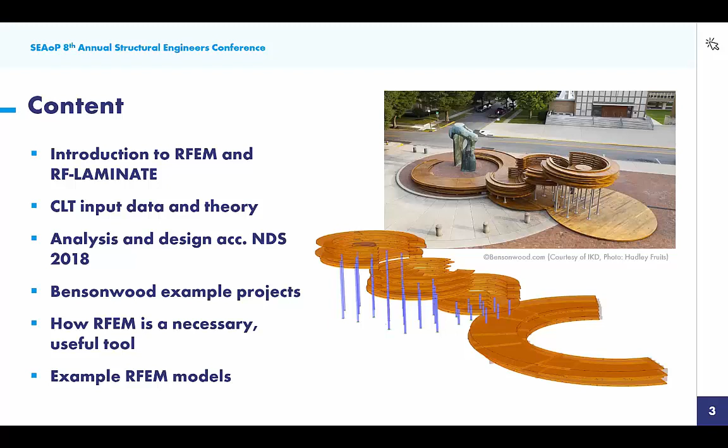Then I'll turn it over to Florian, who is an engineer at Bensonwood, to show you some real-world applications of cross-laminated timber, mass timber, with some example projects that they have worked on. He'll talk about how they found RFEM to be a necessary and useful tool in these projects and go through a few example RFEM models as well.

So I am going to begin within our program RFEM. This is the main structural analysis program. It will provide a full analysis, so things like internal forces, deflection, support reactions. We work with this add-on module concept to provide design of our elements, and today we'll be looking at RF-LAMINATE, which provides design of cross-laminated timber.

For the sake of time, I have already modeled a two-story structure here, and you'll notice that we have several surfaces. If I double click on one of these surfaces, the stiffness type is set to laminate, and this refers to our RF-LAMINATE add-on module, which we'll get into in just a minute, on how we can accurately calculate the stiffness properties of CLT panels.

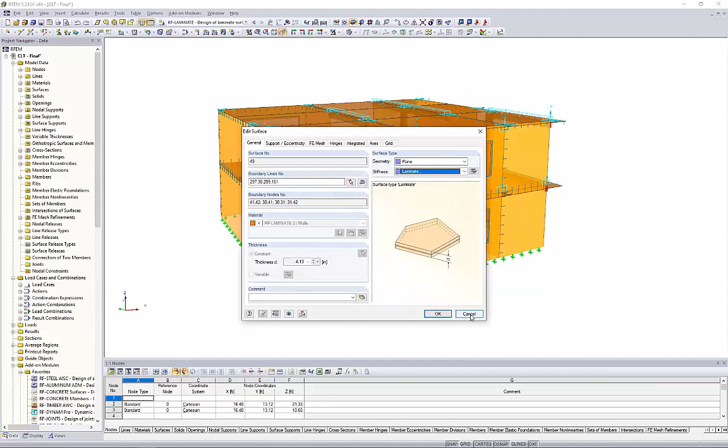I've also combined this with member elements. You'll see here glulam beams, which are dropped down below the bottom of the surfaces for additional support. We have some glulam columns as well, all within the same project. I've also applied loads to this structure. These are just general surface loads.

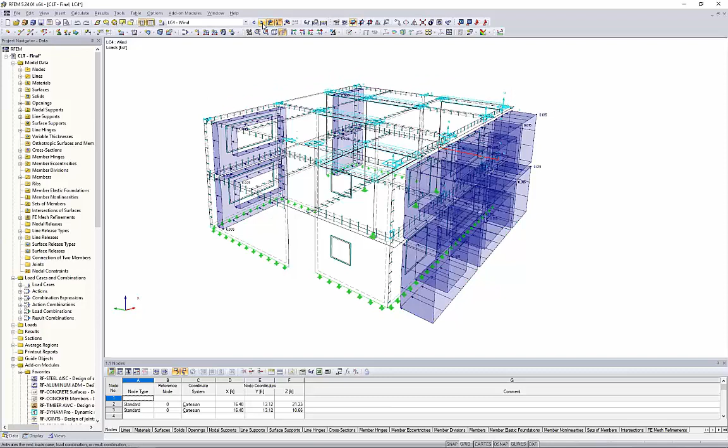Maybe if I turn this to wireframe, it's a little bit easier. We have a dead load applied to the first level and the roof level, a live load, a simple snow load applied at the roof level, and then a lateral wind load. I combined all these load cases into load combinations according to ASCE 7. So when we display these together, you'll see the gravity loads in addition to lateral loads acting on the structure altogether.

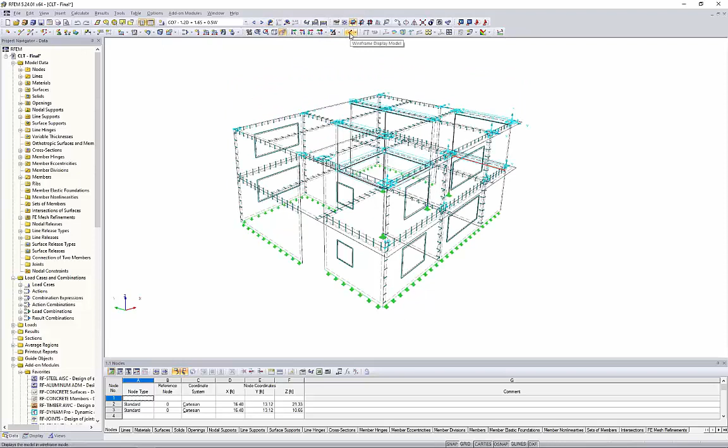But before we run this initial calculation, what's required is to define the correct stiffness types for our cross-laminated timber, and for this we utilize the add-on module RF-LAMINATE. I can access RF-LAMINATE within my project navigator on the left. And when I say add-on module, it's really nothing more than a dialog box that pops up within our main program. So before I give you a quick tour, let us jump back to the PowerPoint to see what's happening behind the scenes with this add-on module and how it's working with RFEM, the main program.

We know with cross-laminated timber that this is going to be individual layers oriented 90 degrees. Each individual layer has its own stiffness properties, so modulus of elasticity, shear modulus. In turn, these individual layers have their own stiffness matrix as well. So these individual layers are what we're going to be defining within RF-LAMINATE.

What we do with these individual layers is create the overall panel. And what's required for this panel, which we might use for a wall element or floor element, is to generate the overall stiffness matrix. We call this the global stiffness matrix of this panel.

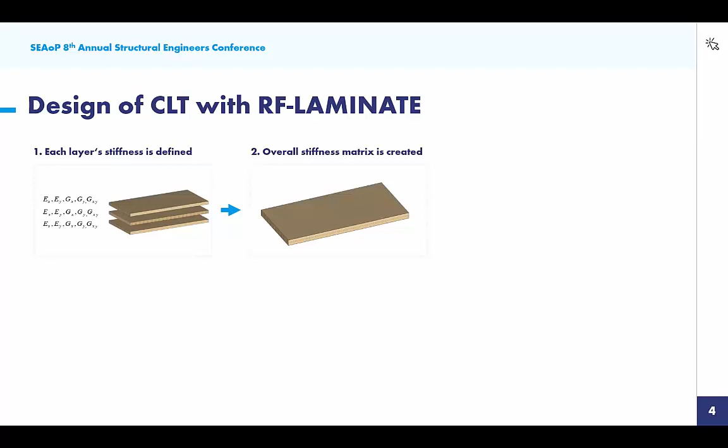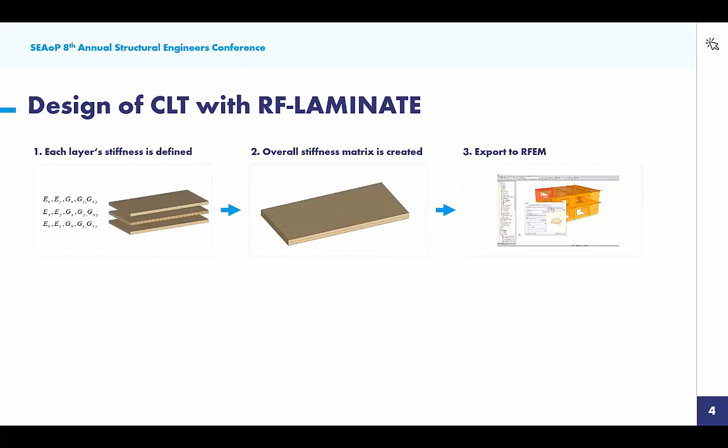So this includes the dead load, live load, wind, snow load. After we run this analysis, we're going to get internal forces for each one of these CLT panels. We take these internal forces from RFEM and bring them back into the add-on module, and we distribute these stresses to each individual layer. Here might be another sample calculation for separating out those stresses.

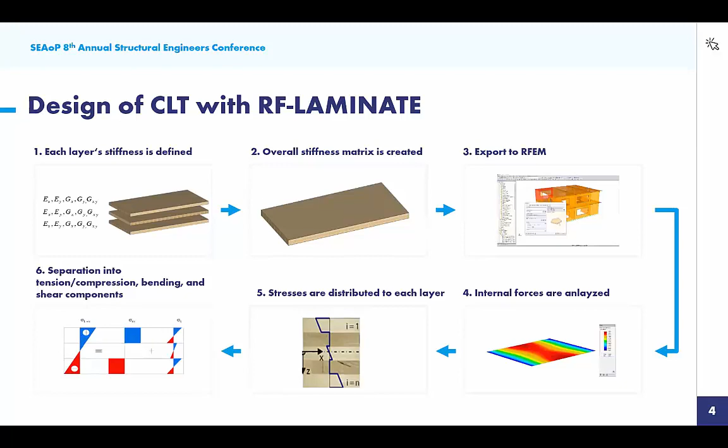Now, if we take a cross-section of our CLT panel, we might see the stress distribution look something similar to this. From here, we separate out all of these stresses into tension, compression, bending, and shear components. These stresses from the analysis are ultimately what we're comparing with our design stresses or limiting stresses based on the material as well as the NDS code. From this, we finally get a design ratio for our CLT panel. So that's what's going on in the background.

So jumping back to RFEM, just to give a quick tour of what this add-on module requires as input, you can see that I can choose the surfaces that I'd like for design. Currently, I've only selected the roof panels as well as 3 wall panels. We could design all at once if we wanted to.

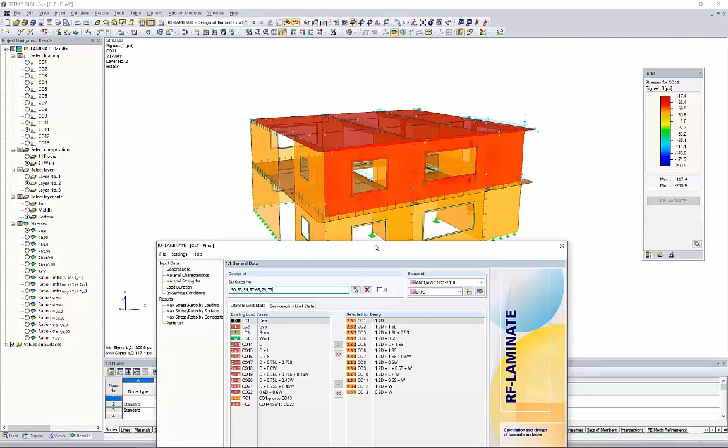Over on the right-hand side, we're going to choose our design standard. You can see the NDS. Recently the NDS has added CLT design with the 2015 standard. We also have the 2018 standard. We have the Canadian standards because that was recently implemented there, and then, of course, the Eurocode.

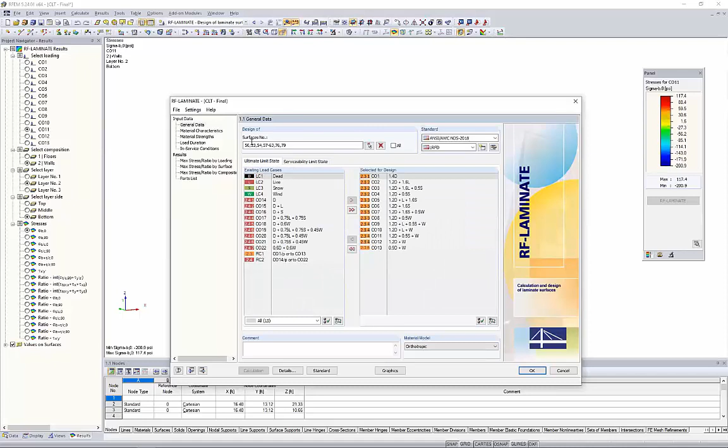For the ultimate limit state design, we would move our LRFD load combinations over here to the right, simply because I'm choosing the design method according to LRFD. Notice ASD is also available here. We can also check serviceability for these panels, so deflection checks, and I'll show you later where we can set that limiting deflection ratio. For this simple example I'm not doing deflection checks, but we'd move the unfactored ASD load combinations to the right-hand side. So it's really as easy as moving down these tables from top to bottom.

Next table, material characteristics, relates back to the PowerPoint model where we're defining the individual layers of our CLT panel. For the first layer, we can access our material database and use the filters on the left to filter to timber. We might choose North America, the NDS 2018, and here's about every timber material available within the standard, with all the relevant material properties. You can use these search functions as well.

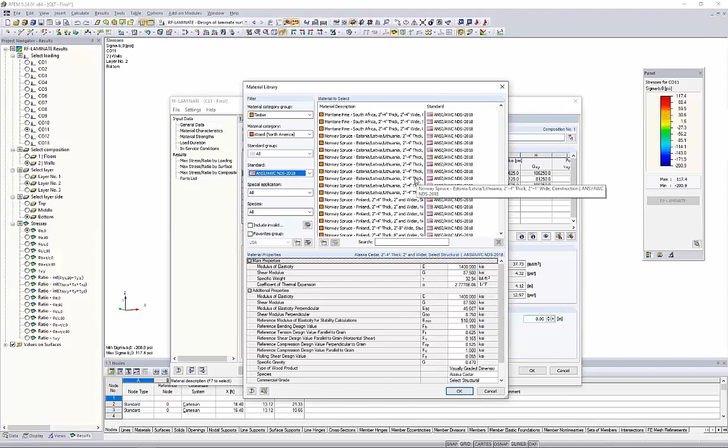Once you've determined the material for that first layer, we would select it. You'd input the thickness, and notice in the third column is the orthotropic direction: 0 degrees, 90 degrees, 0 degrees, and so on. That's the definition of CLT, orienting layers 90 degrees from each other. Then the modulus of elasticity and shear modulus are automatically brought in from the material database. We'd continue to do so for our additional layers.

This might be for a custom layup, a custom CLT composition. We could save these layers to use in a future mass timber project within RFEM. The other option is to import the layers from the library. You can see a drop-down box of various manufacturers. For CLT in the North American market, some familiar names: Nordic Structures, SmartLam, Structurlam, and then the general PRG 320. For example purposes, we might move forward with PRG 320 CLT according to the US.

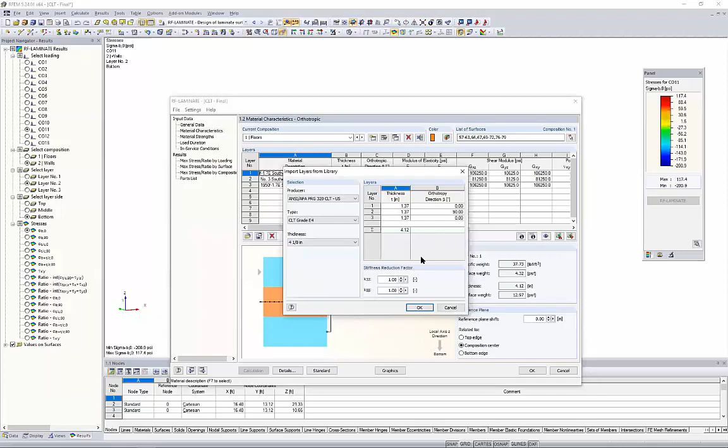So once we select our manufacturer, we would choose our grade from the drop-down. We would choose our thickness, which is going to influence the number of layers for our CLT panel. But notice that the layers are automatically brought in, the thicknesses, the directions. And when we import that in, this entire table will be filled out for us based on the manufacturer's products. So just another option if you do see your manufacturer in there. Otherwise, you can create those custom layups and save them to your library.

Now, again, relating back to the PowerPoint, each one of these individual layers has its own stiffness matrix. So we can actually view the individual stiffness matrix here for that single layer. Well, the program takes it a step further, of course, and it calculates this global stiffness matrix for our panel. So if you're not utilizing a program where you can individually define these layers, you're going to need to put in the global stiffness matrix into your relevant FEA program. So this might be something that perhaps you get from the manufacturer, but ultimately this is the information we need to export back out to RFEM.

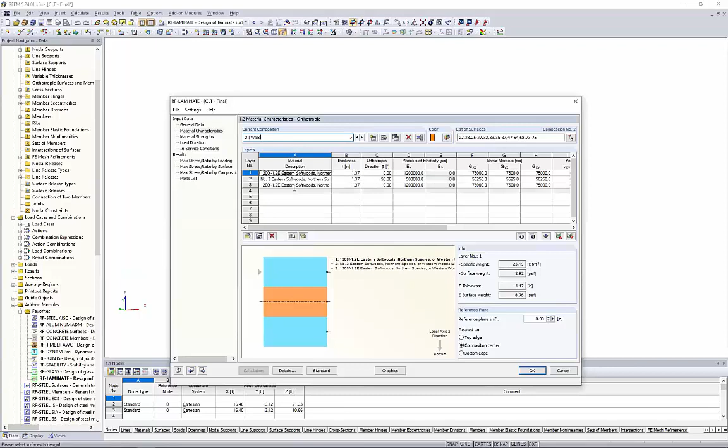So you can see here that I named this composition floors, and I've applied it here to all of my surfaces that are my floor elements. And we can create different compositions for the roof versus the first floor. That's all possible. Exact same concept for my second composition here, my wall elements. And this time I also just have 3 layers for my wall elements. Perhaps we have 5. You can see that I've applied these to all of my wall elements back in the RFEM model.

So before we move forward here, there are some details within these compositions that are really important for analysis, and we can visit those under the detail settings here. So you'll notice we have several options that we can check on and off, as well as stiffness reduction factors. So in order to discuss this a little bit further, I'm going to jump back to this PowerPoint. So here's just a simple screenshot of those first checkbox options.

You can see here the consider coupling is the first one, and this typically is going to be turned on by default. What this means is that we have glue at the top and bottom of each layer, so we have kind of a coupling behavior between each one of the layers. Now, with this option checked on, this would be relevant to our snapshot over here on the left with coupling. So this is a cross section of our CLT, 5 layers in this example. We might see this stress distribution for something like shear stress looking similar to what's shown on the right, normal stress on the left, but notice that there's a relationship here between all 5 of the layers.

When we turn this option off, or assuming we don't have glue or bonding between the top and bottom of these layers, the stress distribution is really going to be individual for each one of these layers. Notice we don't have that same relationship between all 5 layers now. It's really independent. So typically, again, you probably will have this checked in most situations.

The second option, the cross-laminated timber without glue at the narrow sides, this is really specific to the manufacturer that you're using. And this all relates to edge bonding. And we can see this picture over here on the right, a very exaggerated picture of a cross-section of CLT. We know that for each individual layer, the boards are essentially adjacent to each other within one of these layers, kind of similar to what's shown here. Now, again, very exaggerated picture, but what we mean without glue at the narrow sides, we do not have glue in these gaps here. So the boards are not bonded to each other in a single layer.

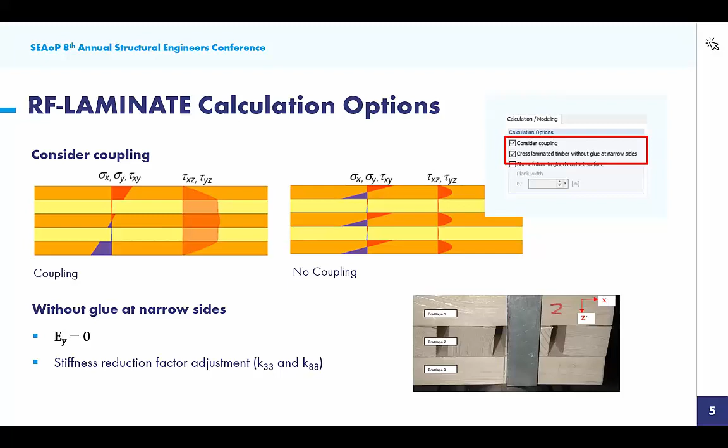So when we have this option checked on, we're automatically going to assume your modulus of elasticity in the y direction of the surface is equal to 0. So we really don't have much stiffness in that orientation of the panel. Now, it's highly recommended that you also reduce the stiffness. We would apply a stiffness reduction factor, K33 and K88, which in turn relate to the stiffness matrix entries D33 and D88. So K33 is related to torsional stiffness and K88 is related to in-plane membrane stiffness. Now, I want to discuss this a little bit further on the next slide.

So the NDS, as well as the Canadian standard, CSA standard, really do not address glue not being applied at the narrow edges or edge bonding at all. It really goes on to say nothing about this. So what we would refer to here is actually the Eurocode, the EC5, and in particular the Austrian Annex, which lays out very clearly what to do when we do not have edge bonding and how to calculate K33 and K88, those reduction factors.

So it does require a few variables for the equations, and we can see the initial variables are given to us here: the total thickness of the CLT panel, the number of layers. So in our case today, we have 3 layers. The board width, today's example, 4 inches. This is information we get from the manufacturer. The board height, 1.37 inches.

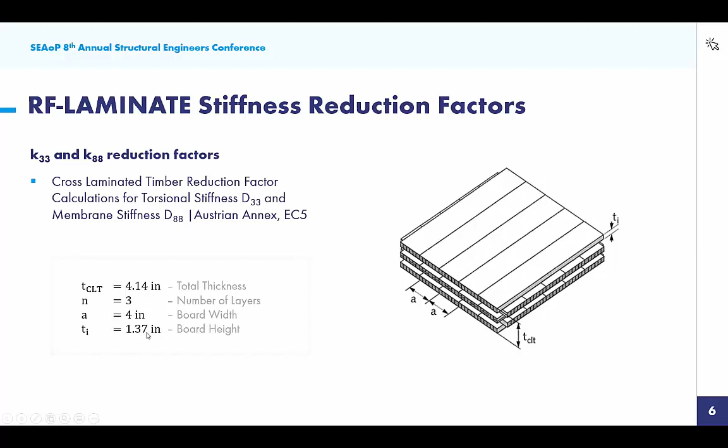So taking a look at the next slide, we also have some additional variables that are given directly in the EC5 Austrian Annex. Depending on the number of layers, 3, 5, or 7, you'll see these variables here, PD, QD, and so on. Well, these are also needed for the K33, K88 equations. And those equations are listed here. Again, directly from the standard, it's laid out quite clearly how we need to reduce the stiffness when we don't have that edge bonding. So we take all these variables from the previous slide and from our table here, and we're ultimately calculating K33 as 0.435 in our example today.

Well, this is the information we apply directly in the program under those composition details. Same concept for K88. We're going to apply those directly here. Now, for some of the manufacturers, these values are included if they don't have edge bonding. For others, maybe we weren't able to get this information. So always just something to double check for your particular project, your manufacturer, and which CLT panels you're using. And again, not specific to RFEM, but this would be a stiffness reduction you'd want to apply with your own analysis tools.

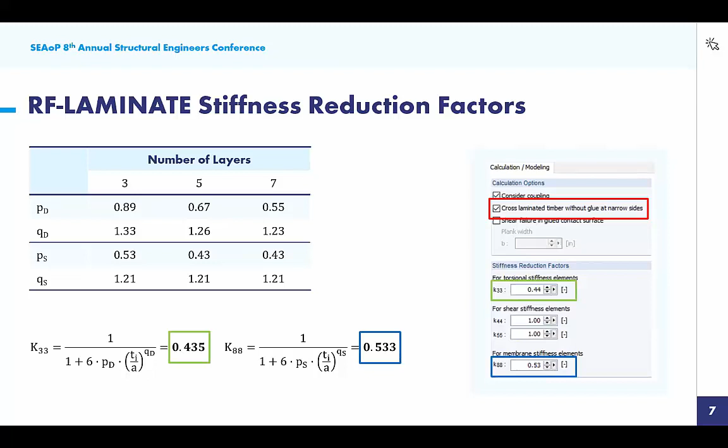The final consideration here for these check boxes up at the top is shear failure in glued contact surface. And this actually all relates to torsion. And we're really mostly concerned with torsion when we're talking about CLT wall elements loaded in plane. We're probably not so concerned with torsion when we're talking about floor elements, for example. Now, this really is also only a concern when we don't have glue at the narrow sides again. So this first checkbox must be checked. That will make this third checkbox available here so that we can take a look at torsion considerations.

Just a small tip, it's really important to set the FE mesh back in RFEM. So our FE mesh settings for the length approximately equal to the board width. So in our case, that would be 4 inches, just for the most accurate analysis. Now, once again, the NDS standard and the CSA standard don't address torsion whatsoever. So we refer back to the Eurocode 5, the 2010 version. I think we're all kind of in agreement that the European standards have been doing cross-laminated timber much longer than what we've seen here in North America. So it's pretty safe to say we can refer back to these standards for considerations such as torsion.

And once again, complete interaction equations are given quite clearly directly within the standard, and we can see those interaction equations in the lower left corner here. And this includes 3 different terms. The first term can be shown over here on the right-hand side, the second term lower right-hand side, and then the third term would be those internal forces and stresses directly from the RFEM analysis to ultimately give us our design ratio for torsion for our wall elements.

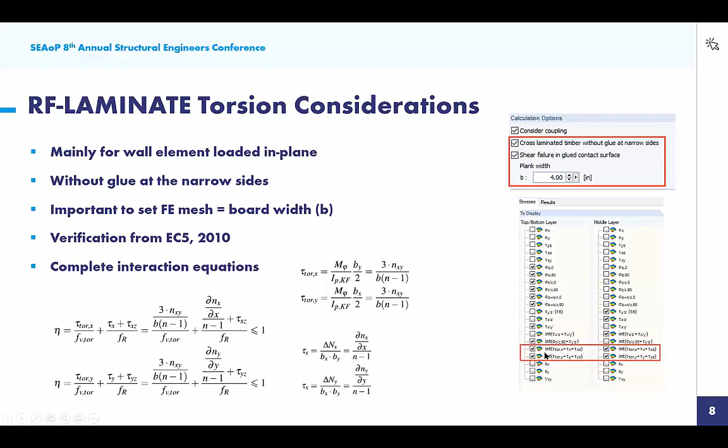Now, over on the right-hand side, you'll see that we have all of these different stresses available to us within RF-LAMINATE. And it's pretty overwhelming. So what we've tried to do is to only check the check boxes that are relevant for CLT design. Now, this includes the top and bottom layers as well as the middle layers, and torsion is actually not one of them that we have checked on by default. So I'll show you in just a minute how we can turn those on in order to take that into consideration for our results that are being shown.

So we'll go back to RF-LAMINATE. If you remember way back when, we still have this dialog box open, and we're currently looking at my wall elements, and we are considering coupling. We don't have glue at the narrow sides. We are concerned with torsion, so we want to go ahead and put in here our plank width or our board width equal to 4 inches.

And just like I showed in the PowerPoint, I calculated K33 and K88, which I'm inputting in here as well. So for my floor elements, if we jump back to those, same exact concept, but I'm not concerned with torsion here. So we can leave that option checked off, but we're still applying that stiffness reduction factor K33, K88.

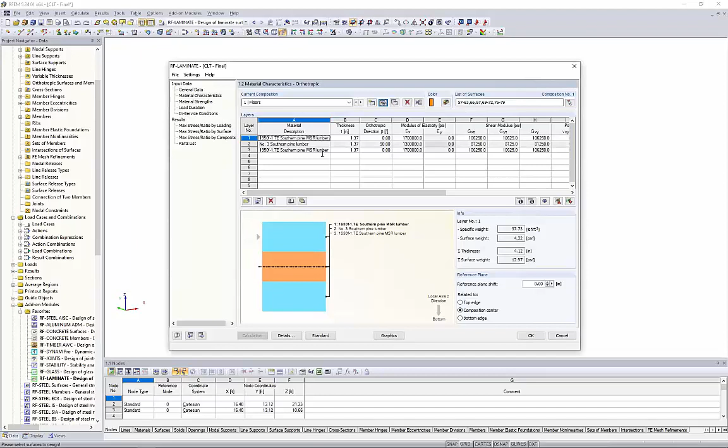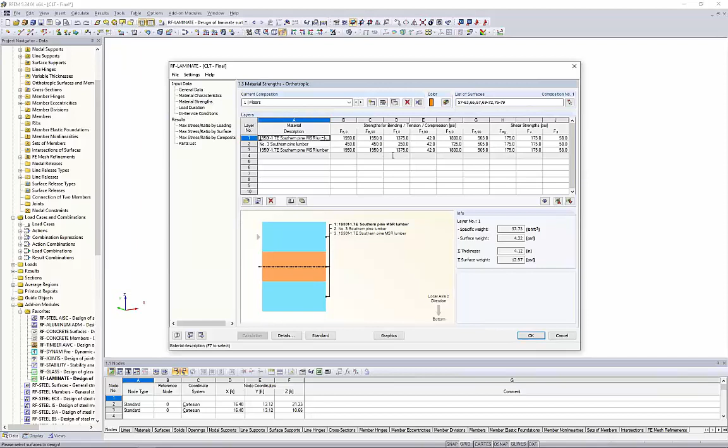So once we have input all this information here for those material characteristics, we can just jump down to our next table, material strengths. Really not much to do here. Everything is brought in from that material library. It's just showing us the strengths for bending, tension, compression, and shear. So this information based on the material properties, in addition to the NDS factors, is what's going to give us our limiting stress values.

And so when we're talking the NDS factors, we might be looking at the load duration factor, which we can see is set within this next table. So dead, live, snow, wind, we would set the load duration factor here. In-service conditions: is your CLT panel dry? Is it wet? What is the temperature it's sustaining? And all of these factors are actually found under the standard tab. So we can see here the relevant factors that are going to be applied for the design purposes.

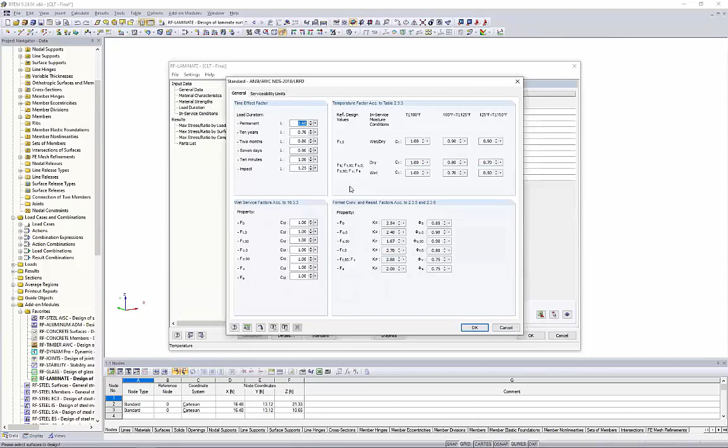You'll also notice the second tab here, serviceability limits. That's what I was talking about. We also can check deflections where we set this limiting deflection ratio directly within the program. We're not checking serviceability today, so this isn't applied, but just to let you know it is available.

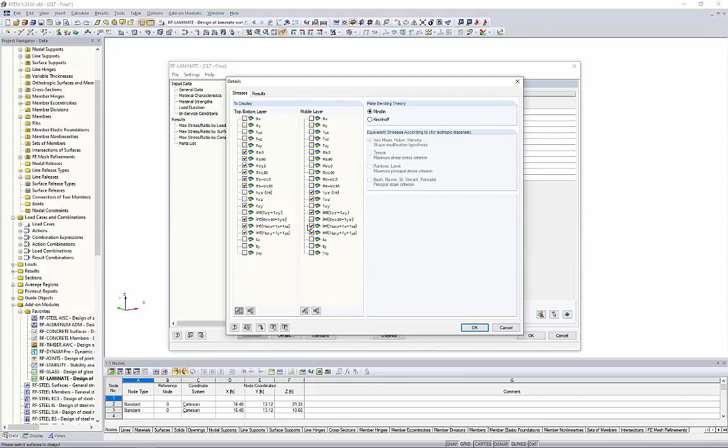So before we're ready to run our calculation, remember I wanted to turn on the torsion checks, so we can do that under the detail settings. And once again, here's this long list of all these different stresses that we can compare and give design ratios. Way too overwhelming. So we have just the default settings here, which likely is going to be most relevant for your CLT design. But here in the lower portion is where we can activate the torsion checks as well.

So we're almost ready to run that calculation, but before we do so, let me jump back to the RFEM program. And again, this is just our main structure, and you'll notice that we have all of these blue symbols shown everywhere. So we might be wondering, well, what are these used for and why are they relevant? And again, incredibly important for the true properties here of our CLT structure.

So let's begin with a couple of adjacent panels, and I'll highlight these and we'll take a look at just the visibility by these selected objects. So two CLT panels side by side, and I'd say in most FEA programs when we're modeling two surfaces side by side like this, the program is going to assume that we have a fully rigid connection between these two panels. And we all know with CLT design that that's not the case. Rather, we're going to be utilizing some type of screw connection maybe, where we have this partially fixed connection, but definitely not a fully rigid connection.

So that's why we would utilize in the program what's called a line hinge. So when I double click on this line hinge, you'll notice I have the ability to fully release the moment between the two panels. So that's probably one consideration we want to take. We also have the ability here along the joint length to set some type of spring constant, and this might be for the slip of those screws between the two panels. For my example today, I set this to 50 kips per square foot, but this would all be relevant to the type of CLT connection that you're using for your projects.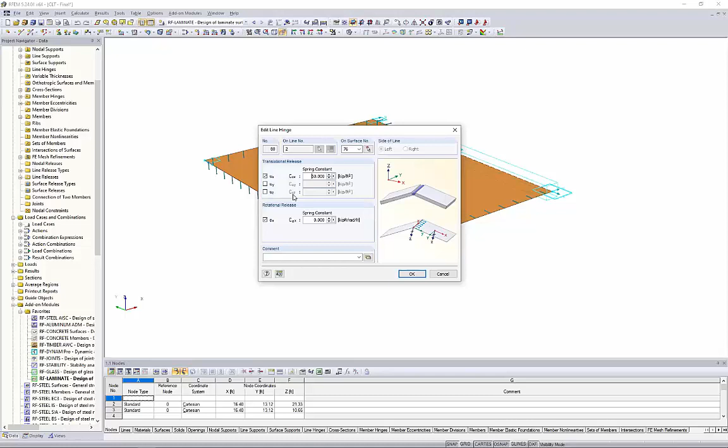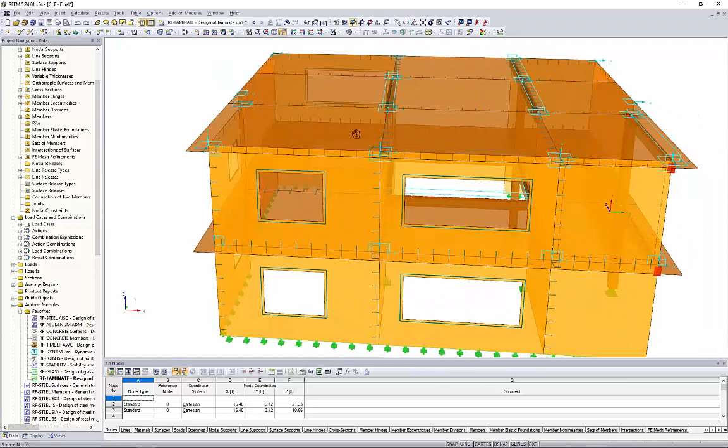The other 2 degrees of freedom here, translation in the Y and Z direction, are left at fully fixed. So this is definitely something that you need to apply, and this is why you're seeing, when I cancel out of this visibility mode, these line hinge symbols shown everywhere throughout the panel connections. The other symbol that we're looking at here are these long blue lines. And for this, let me go ahead and create a user-defined visibility here, just so that this is a little bit more clear.

Well, similar to our adjacent panels, we have these beams dropped down below the CLT panels just for additional support here, these downspan glulam beams. Very similar to what we're seeing with the CLT panel connection when they're adjacent to each other, this is going to assume a fully rigid connection between this beam and the CLT panel. Once again, we know that's not the case because of these screw type connections.

So we need to adjust this fully rigid connection here, and we do so with what's called a line release. When I double click on this line release, it's actually very similar to a line hinge. It's just a little bit more applicable to beam to panel connections. With this, we can define the line release type by releasing the moment. Once again, we can see that here. And then we're also going to apply that stiffness slip to the joint along the local x-axis of the line here, so 50 kips per square foot. The other two we leave as fully fixed.

Now, another advantage of a line release over a line hinge is the ability to define nonlinearity. So you're going to see here friction, partial activity, and so on. Where this might be relevant is in the vertical direction. Maybe we have a scenario where we would like full force transfer when we have the CLT panel bearing down on the member, but in the event of uplift, we want that to be completely released. That's all possible with these nonlinear applications. So that's why we have these line releases everywhere where we have a beam connecting to the panel above it.

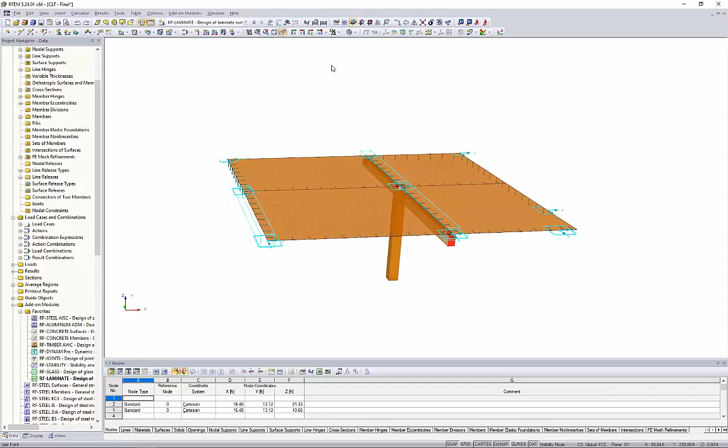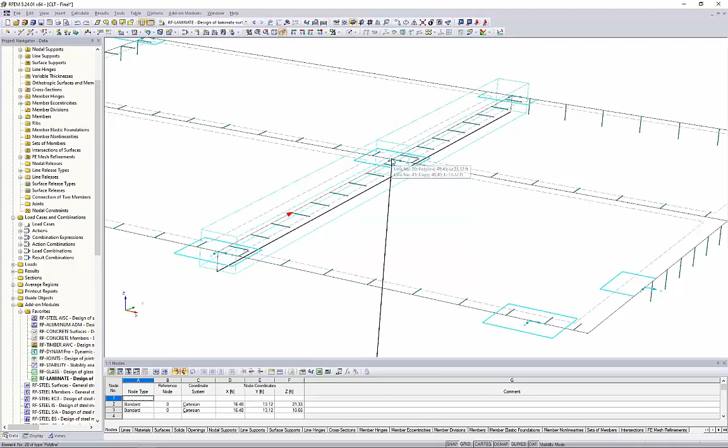Now, the final application here, which we'll notice, is these rectangular blue squares. These are going to be used for singularities. And where might we see a singularity? Well, we convert this to a wireframe view, and we know from general FEA programs, and this is true not just for RFEM but for all programs, that members are represented by single line elements at their centroid. So this column is just a single line element, and it's framing into these 2D surfaces at this single tiny FE mesh point here. So you can imagine the huge spike in stress or internal forces that we're going to see at this single FE mesh point, simply because we don't have great load distribution. Singularities happen in all FEA programs, so you're going to have to find some way to level them out.

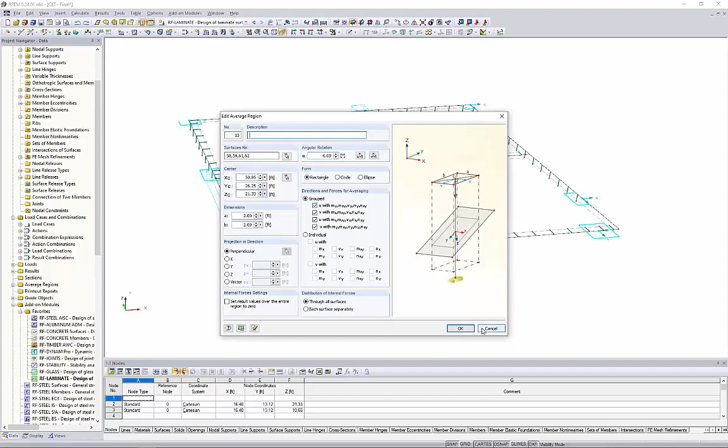In RFEM, we can apply what's called an average region at these locations. An average region is exactly what it sounds like. It's going to average out the forces over a specified dimension. So I've set here 2 feet by 2 feet. I'm averaging out the forces in all 4 directions, and we can smooth out those high peak internal forces and stresses that we know aren't going to exist in a real life application, but are not really avoidable when we're talking FEA design. So that's why we have these average regions shown within the structure. Canceling out this visibility mode, that explains why we're seeing all of these blue symbols everywhere. Now, these average regions can be taken into consideration within the add-on module RF-LAMINATE as well.

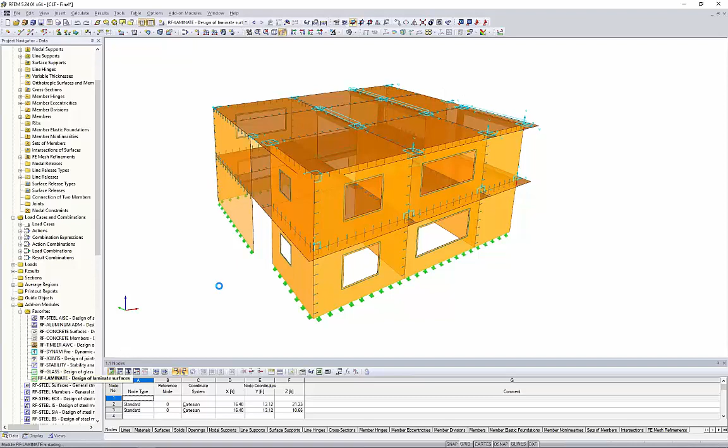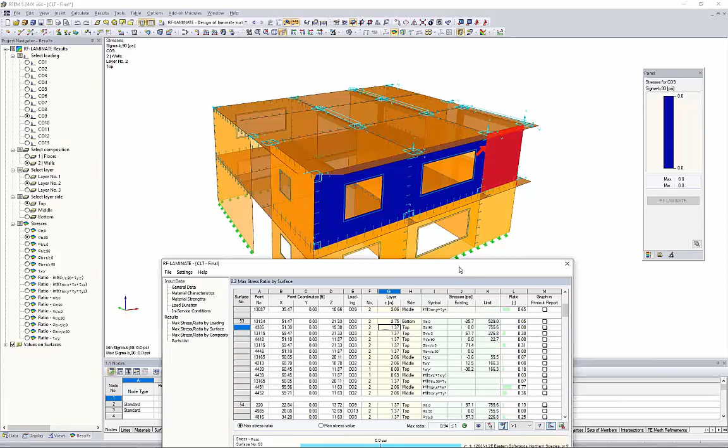So once we've applied all these line hinges, line releases, and average regions, if they're necessary, we're finally ready to run the calculation. So we'd hit calculation within our add-on module, and we're presented with our results in table format. We can view the max stress ratio by surface, for example. As I'm scrolling down through this table, everything's synced up in the background to highlight the surface that I'm looking at. Maybe a little bit difficult for you to see, but there is a red arrow here pointing exactly to where my controlling stress point is for that particular check. So that's a nice feature to see, relative to the table, where exactly we're at in the structure.

But taking a look at the actual data that's presented in this table, well, this is where we're going to see each individual surface in each one of these categories here. And we're going to see the bending stresses. We're going to see tension compression stresses. We're going to see combined bending, tension, compression, as well as shear. This does include rolling shear checks as well. And then remember those torsion checks that we've also activated.

So within column J here, we're seeing the existing stresses. So this is purely from the analysis, which if we remember way back when to the PowerPoint, we're bringing in these stresses and we're separating them out to each layer into bending, tension, compression, and so on. Well, column K here is going to be the limiting stresses. So this is just based on the material as well as the NDS standard and those factors being applied. And ultimately in column L, this is where we're getting our design ratio.

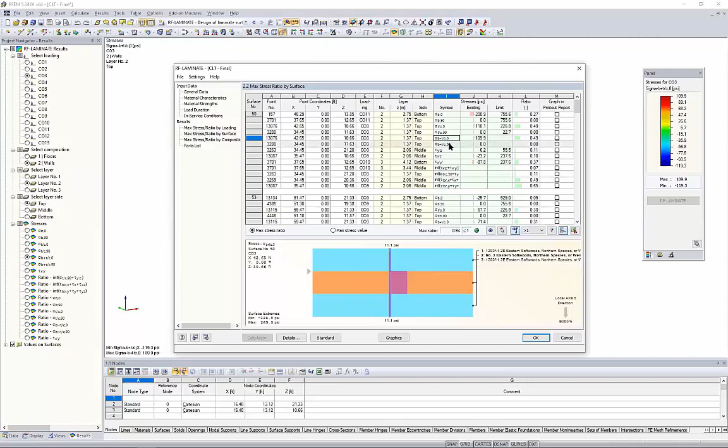So we can go ahead and filter this information. We can export at the click of a button in Microsoft Excel if we need to sort a little bit further. But ultimately, we're seeing a max ratio here of 0.94 for our example today. We have our green smiley face because it's less than 1.0. As we also know from the PowerPoint, I talked about the stress distribution for each of the layers. We can see those stress distribution diagrams shown here as we kind of click through all of these different applications here for each one of the surfaces.

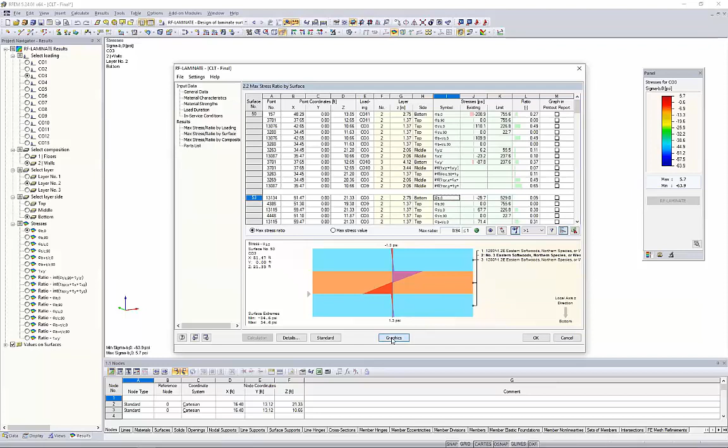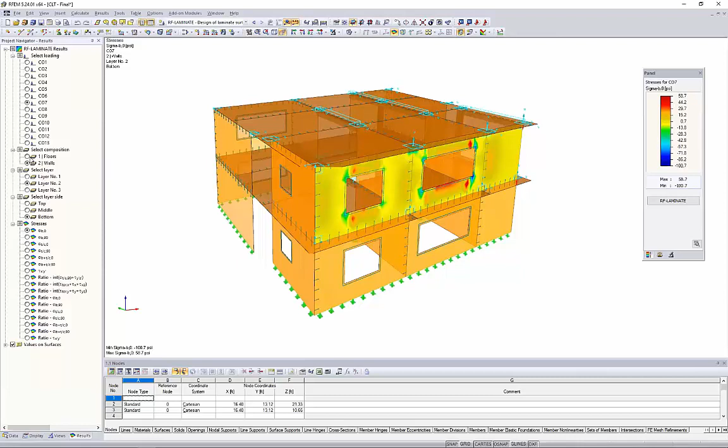So in addition to all of this information being shown in table format, of course, we can always jump to the graphics view here. And this is the results from RF-LAMINATE. We can see it selected here within our drop-down box. We're just viewing them graphically back in RFEM. So we can scroll to the different load combinations here if we're interested in those results. We can take a look at our wall elements, but we can also switch to our floor elements. And with these additional options here, we can also take a look for our floor elements.

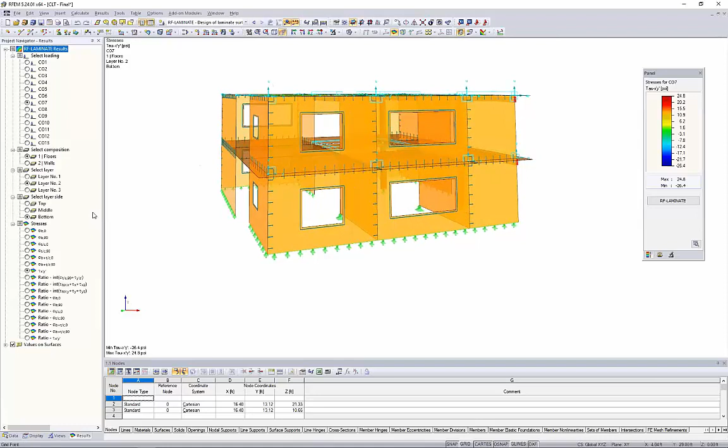We might be interested in the bending stresses, for example. We can also take a look at the tension compression forces. Shear, of course, is something that we're also considering. Jumping back to our wall elements, we're probably most interested in shear. Things like tension and compression are also shown available to us. And of course, we can view the design ratios in color formats as well. So we can print off these pictures into our printout report and take a look at the results in something other than table format with numbers.

So hopefully this was just a quick introduction to CLT design. And like I said, some of this information that we're taking away from this first part of this presentation into your own programs or your own design methods is consideration of that global stiffness matrix. Do we need to reduce some of the entries such as D33 and D88 if we don't have glue at the narrow sides? And then also back in the RFEM model, things like line hinges to make sure we don't have a fully rigid application between adjacent surfaces, line releases, and so on.

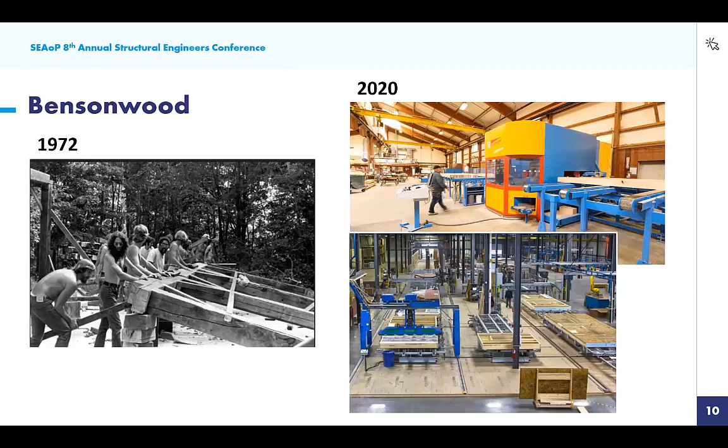And then the lower picture is our panel shop that we opened in 2017. Again, it's highly automated. The panels get built, and they get transported through the shop on some kind of car, and they just move along. The nailing is automated, and then on the left you can see where the cellulose insulation gets filled, and then a little later in the shop it gets put upright, windows get installed, and yeah, that's what it looks like today.

All right, enough about Bensonwood. This is the first project that I wanted to show. This is called the Conversation Plinth. It's more of an art project than it is a building. It was open to the public. You were able to walk on there, and you could stand on top. But it was just a temporary construction. It is CLT, and it's not really protected. It's outside, and so it was just a temporary installation. But of course, it had to be fully calculated because people were using it.

The project is made out of hardwood CLT, which is pretty unusual. But there was an initiative in Indiana to promote the use of hardwood, locally grown hardwood, and so they came up with this installation and came up with a custom layup of a hardwood CLT. And all this was done in RFEM. You can see the model on the right. I don't have the model available, but I have this photo of the model.

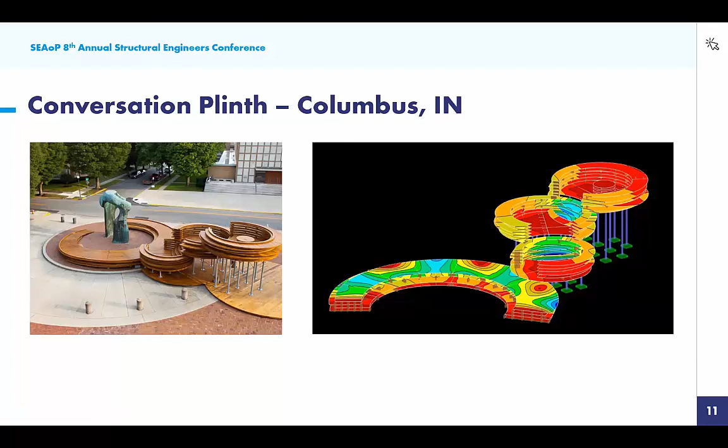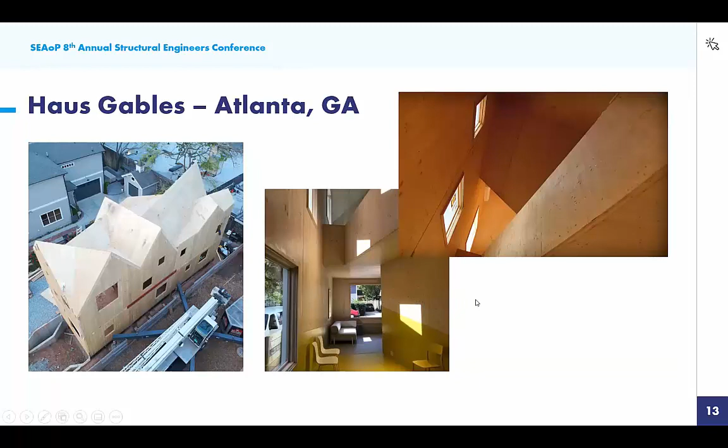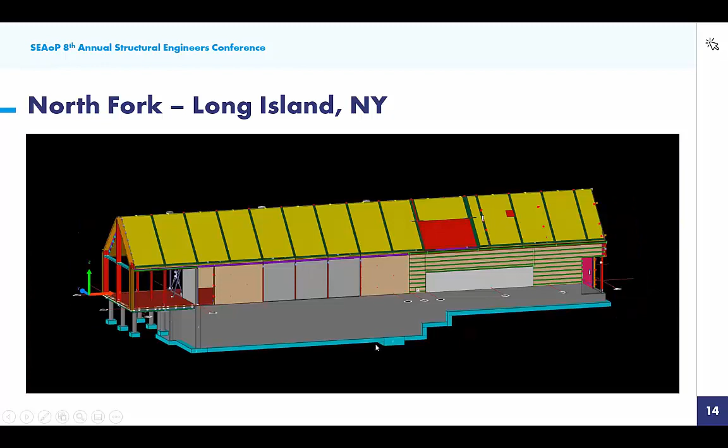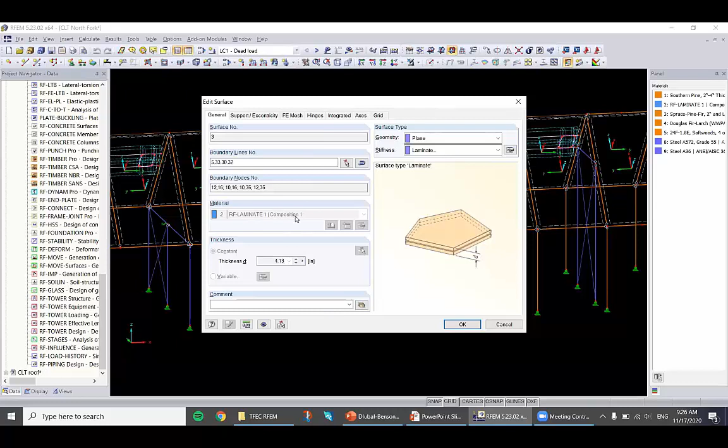This is the cadwork model that we used, and then this is the RFEM model. And for this project, I'm actually gonna switch over here. So that is the actual model. I did also work on that, so I can talk a little bit more about this one. I'm going to open one of those panels. As Amy explained earlier, we're using the laminate module here, so the whole build-up is defined in the other module.

I'm opening this to show how those hinges work. So on all four sides of this panel, there's hinges defined, and then the rotational release is always set to 0 because obviously there's no moment connection there. And then we went so far as to define all 3 of the other connections with springs.

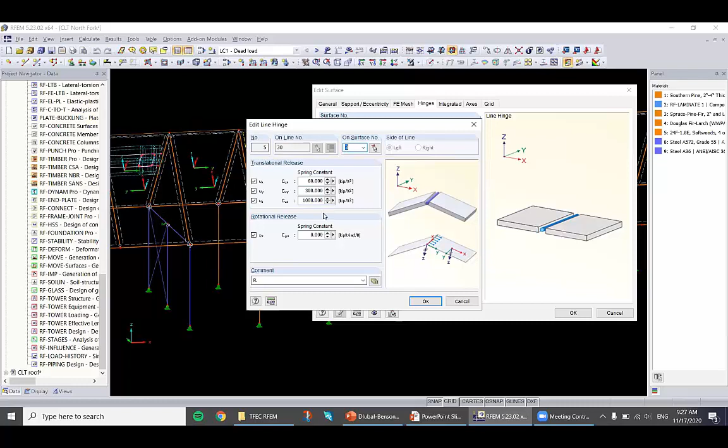This is a little bit of a process, but it's very important to get that right because it has a lot of influence on the stiffness of the whole building and deflections. The way we did it here is we would build the model and have all this set to infinite stiffness, and then just run the calculations, look at the forces that are there, and then come up with a screw size and screw spacing that would work.

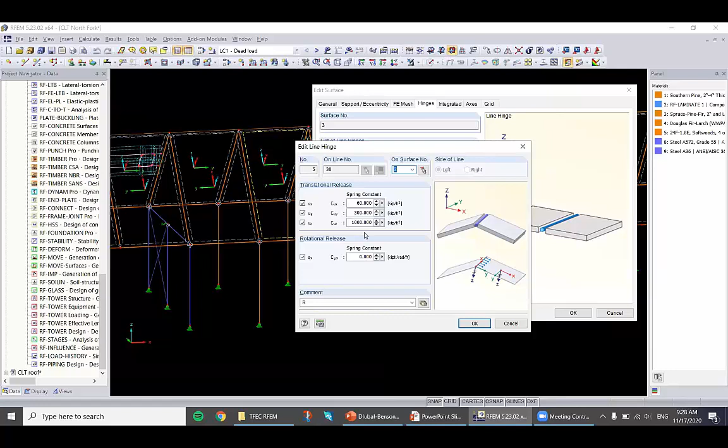And then we put this into an Excel sheet, and then look at the stiffness that would provide, and then put that stiffness into those boxes, run the calculations again, see if the deflections and the forces check out, and do this for a couple of iterations till we're happy, till we don't feel like there's a ton of screws, even though there are a ton of screws, and the deflections are still acceptable. That kind of process needs to get done for a lot of those connections.

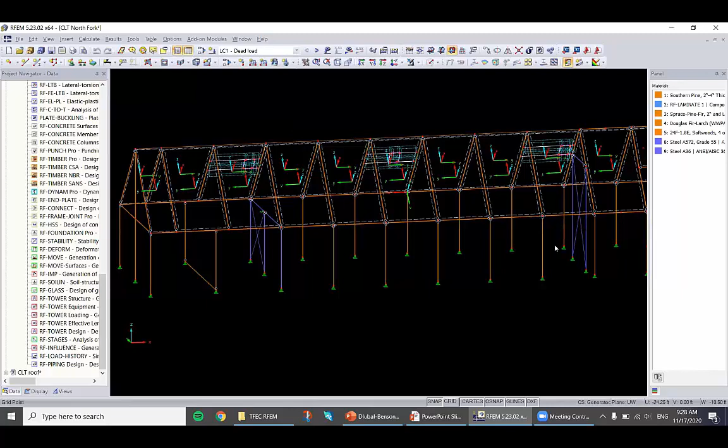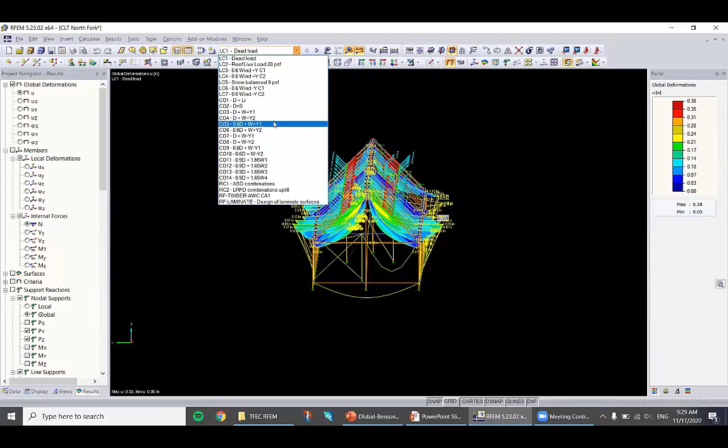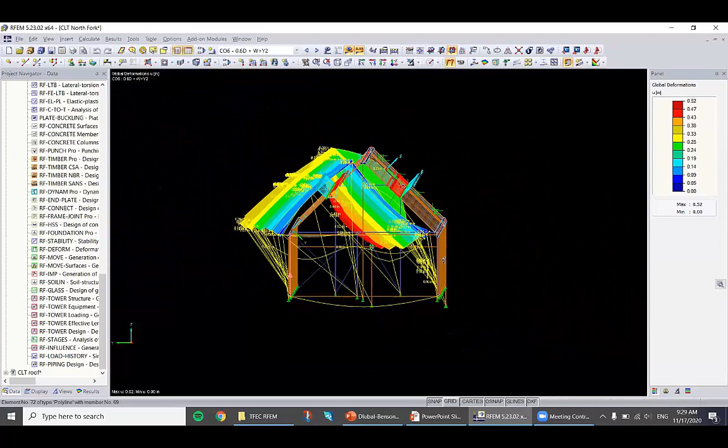Yeah, so you can see the results here. We analyzed the whole building as in one model, which we usually don't do, but in this case, there was just no way around it. And you can see the drift that we're expecting here is about 3/8 of an inch, and that's also what we wanted to limit it to.

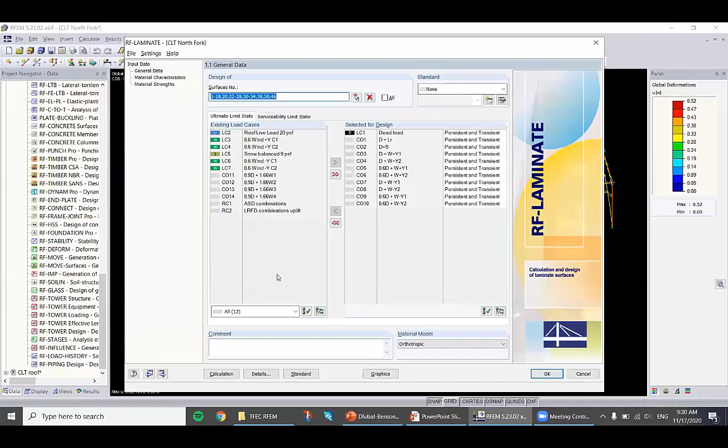I'm going to jump real quick into the module. Amy was talking about that before. I'm just going to go over this from a real-world example that is standing in Long Island as we speak. So what we used is a Nordic CLT in this case. It's from Quebec, Canada. They use black spruce, very small dimensions often. They have very small trees, but they glue it all up into big beams and CLT panels.

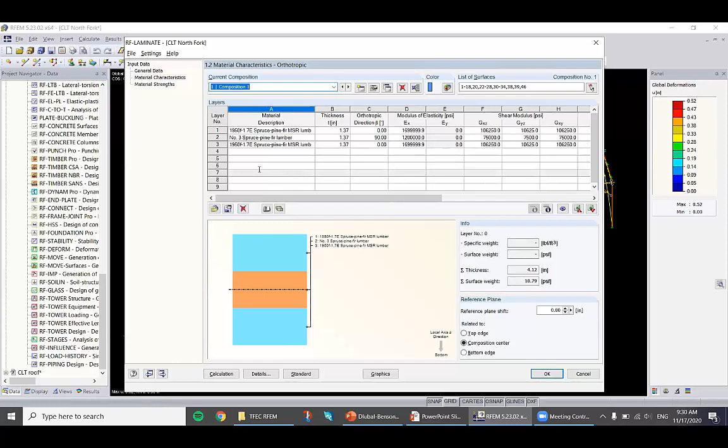In this case, we weren't so much interested in the actual span capacity. There were rafters in the roof, as you saw in that one picture. So the span was really not the main focus. It was more the focus on building this into a nice diaphragm. So a simple 3-ply was good enough. It's very easy to import this. Nordic CLT is built into the program. So you just pick your manufacturer, and then the type is US. They only have one type really, and then they offer different thicknesses.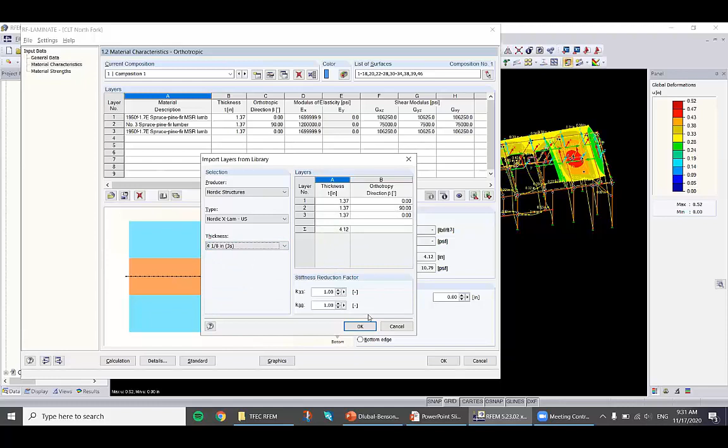This is not what we used. That's a 5-ply. So let me check that. Actually, this is the one that we used, the 4 1/8. And then if you click OK, it just imports it. I'm not going to do that because it will delete the results if I do. Yeah, so that's how that module works. I don't have results in here right now to show. I'm going to go back to the presentation.

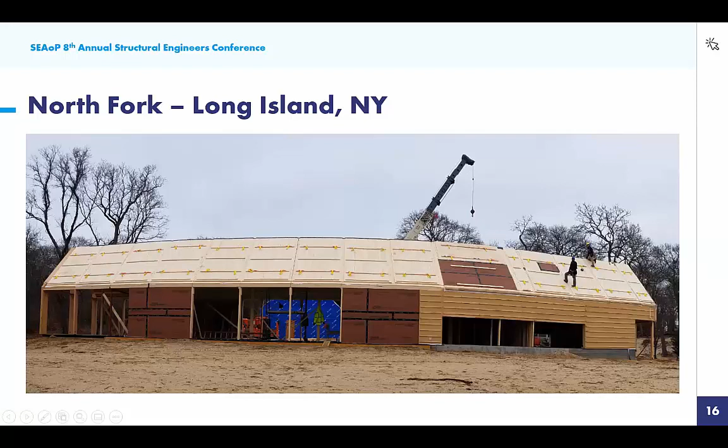That's what it looked like on site. You can see the CLT here. Those are the actual CLT panels. They were on the outside. Insulation was on the inside. Yeah, and that's the great open space that they were looking for, and that we were able to achieve without the use of too much steel, and definitely without moment frames.

Someone might ask, why would you need CLT for that? That's a good question. It's not necessary. It could have been done with sheathing as well. But I personally wouldn't have felt comfortable doing something like that with just, I don't know, 1/2-inch OSB sheathing. The forces were pretty high, and I don't think that would have been a good solution.

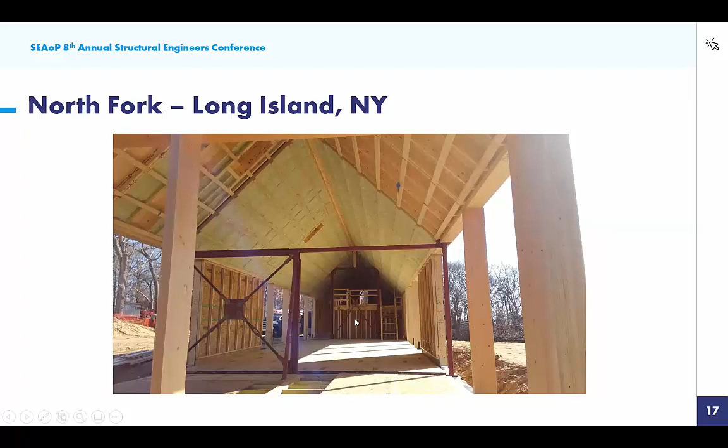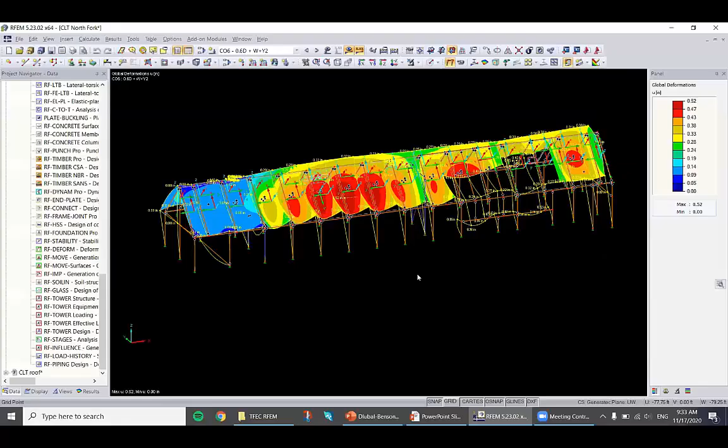This is another project. We never got to build this one. Unfortunately, it was just a concept. It's in Washington, D.C. And the architect was looking for, again, some kind of a folded roof structure that was self-supporting. This is the CLT, the RFEM model. We decided that CLT would be the easiest way to do this, again, due to the biaxial bending capacity and the high shear capacity.

So we were able, sorry, I should mention, so there's support all the way around, and then there's these two interior supports that we couldn't do without. So there's a wall here, and then there's two more walls over here that hold up the roof. But everything else, there's no other supports in there. And we were able to prove that it's possible to do this with CLT panels.

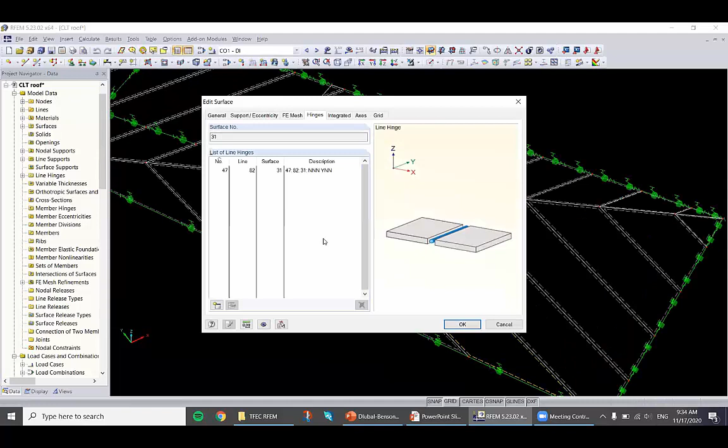It's essential to break up the model into actual panels, like the actual panel width, so that you can model the edge correctly from one panel to the other. Since this was only a concept, we did not go so far and define the spring constants for the connections there, but definitely create a moment hinge at the panel seams.

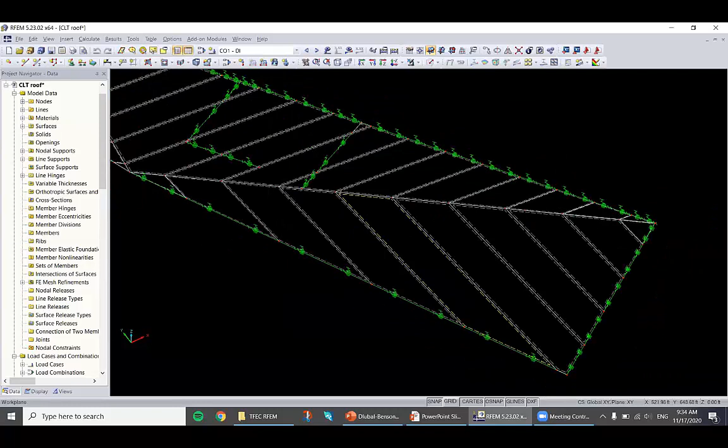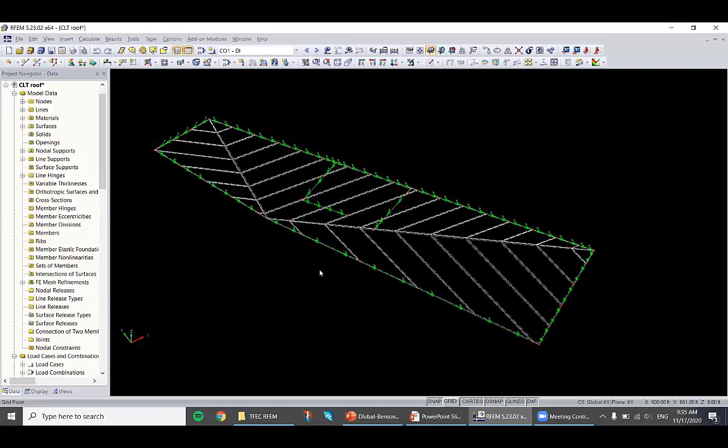Again, there's no beams in here. It's just supported by the exterior walls and those two interior walls. And I'm not sure how to do this without an FE software. Maybe it's possible, but it's definitely way easier to do something like that with a program like RFEM, where everything is predefined.

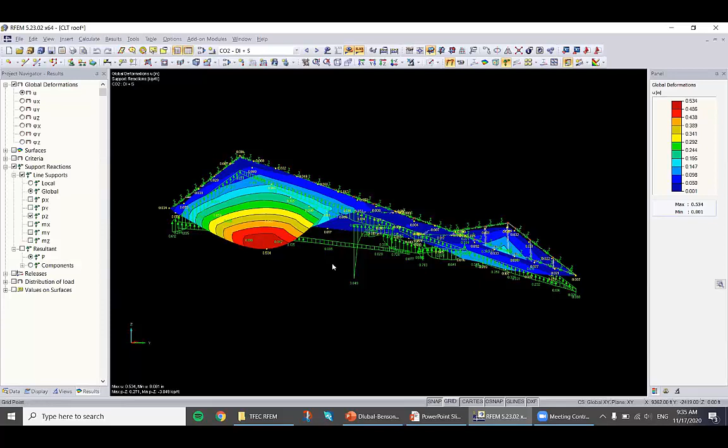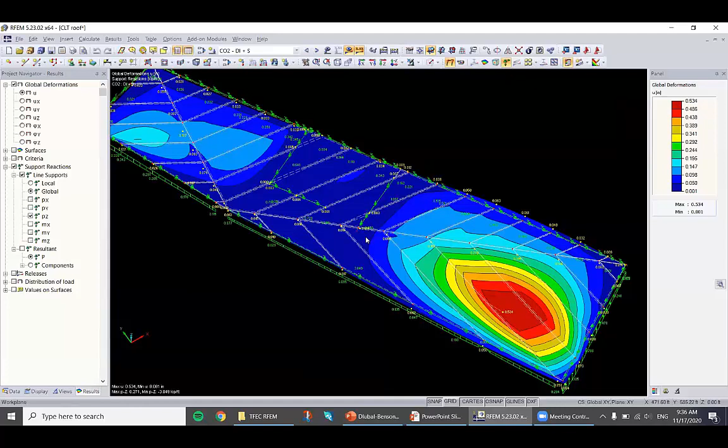This is the dead load deflection. The dead load and snow deflection is 1/2 an inch, and then as you would expect, you get these load spikes here, and there certainly would be more analysis necessary to look into those locations, and I'm very happy to hear that there is an average region available now. I did not know about this, but that is definitely something that will help a great deal resolving situations like that.

Here's another project where we used a lot of mass timber. This is the Common Ground High School in New Haven, Connecticut. It was a collaboration with Gray Organschi. Again, the timbers came from Nordic. That is all the glulams and the CLT that was used. In this case, we also provided the insulated wall panels.

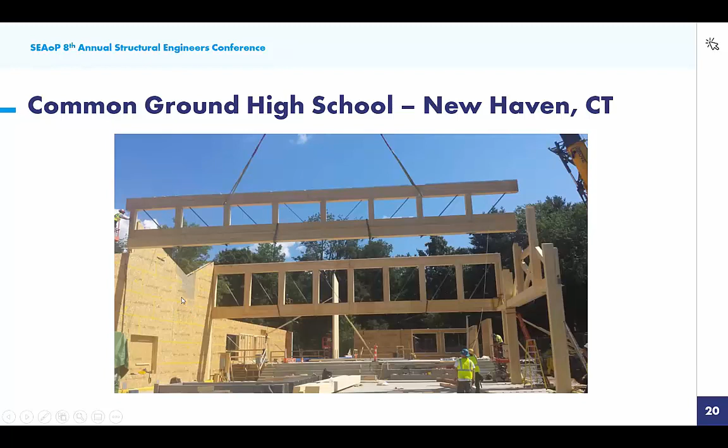Some of the highlights of the project are these massive trusses. You can see a person right up there. They provide a clear span for a gymnasium. All these timbers are from Nordic. The trusses were built in our shop, and then they were shipped to Connecticut, which is about 2.5 hour drive away, on an oversized truck. Again, the focus of Bensonwood is to try to prefabricate as much in the shop as possible. Those wall panels you can see, they were all built in our panel shop and shipped on site with a truck.

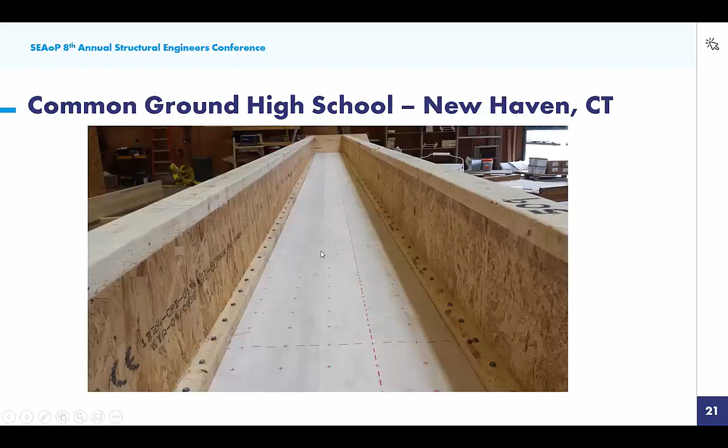This is one of the CLT applications. So what you're looking at here, this is a CLT panel, and then those are I-joists. It's a very long span, and neither the I-joist nor the CLT on its own could span that far, but combined, it was possible to span that distance. You can see there's a lot of screws in here to create a shear connection. Unfortunately, at the time, we did not have RFEM yet. And so there was a lot of hand calculations and probably some extra screws to be on the safe side. With a software like RFEM, this could be done much easier, and deflection results are way more accurate doing this with an FE software.

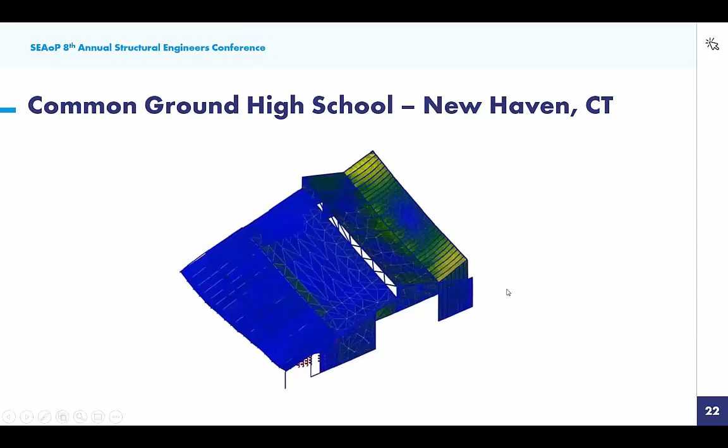This is the model that we used at the time. That's a visual analysis. We did again use some diaphragm action here to hold up the roof. It was not quite as extensive as on the North Fork project, and in this case it was only sheathing. The sheathing was OSB, like 5/8 or 7/8, and it would have been better to have a program like RFEM to really get the full potential out of the mass timber.

One reason being is material consistency. There's a lot less coordination necessary if there's just fewer trades on the job site, and whoever builds the rest of the structure can provide the elevator shaft as well. It's much faster installation time. And of course, there is the advantage of the carbon sequestration. As we all know, CMU, or really any other building material, produces carbon, whereas wood stores carbon.